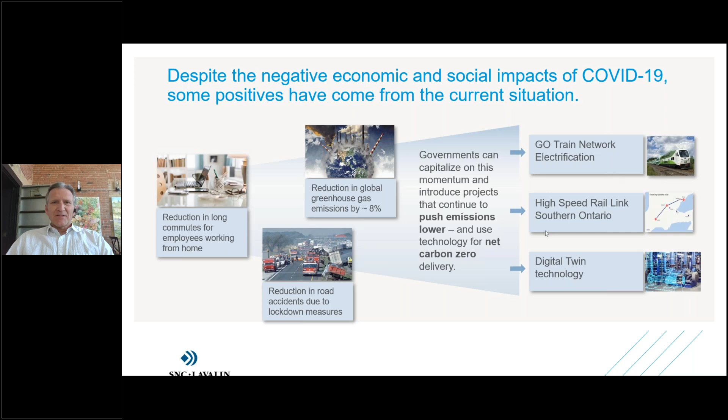So this really is showing that the money is kind of there for stimulus spending. We've seen some big headlines, a few of them noted here on this slide.

If we go to the next one, Barb. So here in Canada, there's also been quite a lot of chatter about stimulus spending and huge benefits from that. In fact, just yesterday, the government of Quebec announced $3 billion for the acceleration of about 200 projects in various sectors within Quebec to help stimulate that economy.

Ontario issued earlier this week RFQs for stages of development of the Ontario Line subway. Next slide.

These are all positive things. Economic data shows that when 1% of GDP is invested in infrastructure, the economic output increases by about 0.4% in the year that that is invested, and that increases to about 1.5% four years later.

Infrastructure spending creates jobs for Canadians. It closes the infrastructure gap we've heard about, and that gap has actually been limiting Canada's economic growth and Canadians' quality of life. So a lot of positive things can come out of the stimulus that may be applied to infrastructure. Next slide.

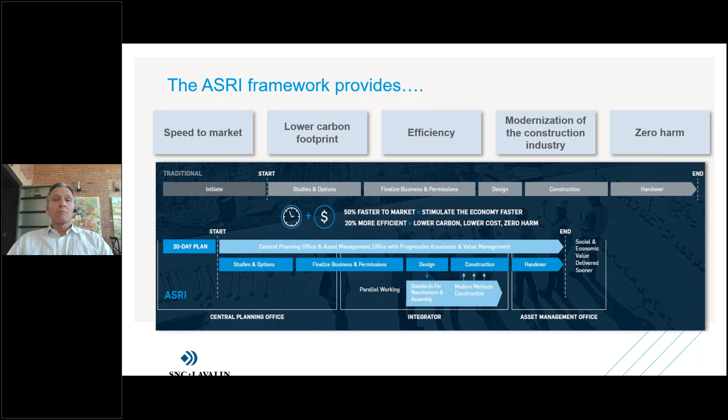We're really excited about this concept, currently discussing it with various levels of government as an opportunity for them to expedite shovel-ready projects and jumpstart the economy post-COVID. So that's it for me.

I'd like to now hand off to Kathy, who will talk about the nuclear sector. So, Kathy.

Great, thank you very much, Dale. Good morning everyone, and thank you very much for joining us today. I'd like to give some insight into sustainability from a nuclear industry perspective, and I have a couple examples to illustrate the points as we go through.

The first example is how we are helping to extend the life of Ontario's CANDU reactors. SNC-Lavalin is involved in Canada's largest clean energy projects. We are doing these projects in order to provide 30 more years of clean power. This is very important because nuclear provides 60% of Ontario's electricity.

Two of the main projects we're doing are at OPG Darlington Unit 2, which reconnected to the grid just this past May. This was a huge undertaking by a lot of people, and they really do deserve kudos for such a great job. Also, Bruce Power Unit 6 started their retubing earlier this year.

In order to support our clients and make sure they meet their sustainability goals, we have been investing continuously in developing advanced tooling for these retubing projects. It's important that we continue this investment because it helps reduce the schedule to get the nuclear power plants back online quickly, and also helps increase the safety of the operators while undertaking the refurbishment projects. Now, as our fleet continues to... could you please go back, Barb?

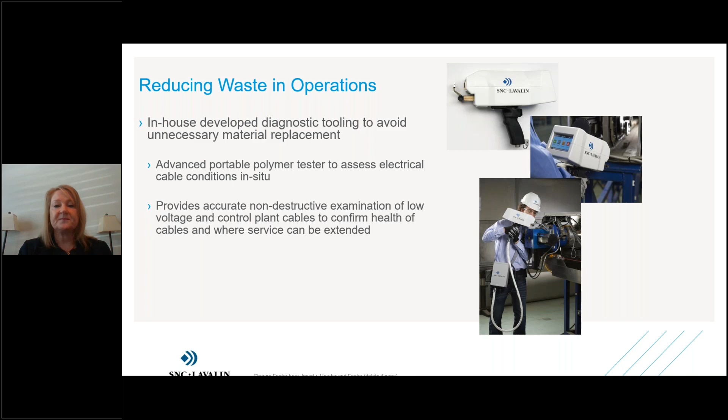Another way we're reducing waste in operations is by using spent fuel from other reactor types in the CANDU reactor. We can directly use recycled uranium in CANDU reactors without needing re-enrichment. We can also blend reprocessed uranium from light water reactors with depleted uranium, a byproduct of enrichment, and use both in the CANDU reactor to generate additional energy. This increases total resource utilization and reduces overall spent fuel per unit of energy generated. We're always looking at new innovative ways to reduce waste.

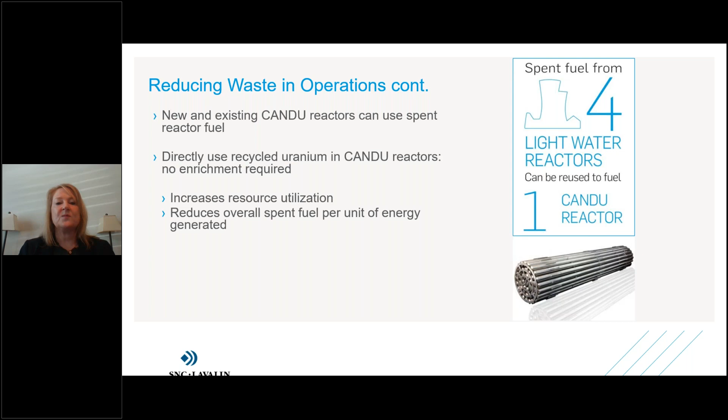Another area we're focusing on is decommissioning and waste management. First, we're looking at enabling a site, once decommissioned, to be reused. This involves meeting predetermined release criteria set out by regulators. If we can do this, we could even use these sites for offshore wind development or other renewables, repurposing them for a different energy productive use.

We're also looking at waste minimization, recycling and reusing materials when decommissioning. For example, we reuse clean concrete from demolition to backfill basements and landscape sites. We're also recycling metals and introducing these clean metals back into the nuclear industry. It would be incredible if we could take metals from existing reactors, clean them, and use them in the next generation of reactors we're building.

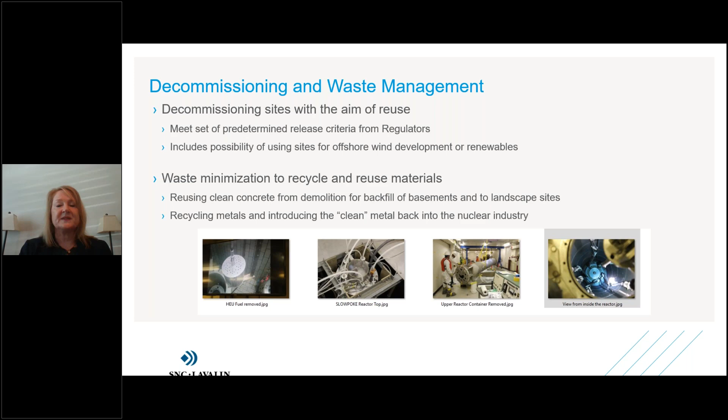As Dale mentioned, COVID has set us back in some ways, but we've been innovating to keep operating. One way is using digital solutions. I'll give a couple of examples, but we have many others we're currently undertaking.

We've continued site walkdowns and data measurements using handheld laser scanners and a 360-degree camera. This just involves one person, who'd already be going to the site, taking the tools and collecting data. This allows staff back home to use the data multiple times, saving many trips to the station, and in this COVID situation, allows our work to keep going.

The next one is the CANDU small modular reactor, which we're currently developing. It's a 300 megawatt reactor incorporating decades of experience and operational insight from our CANDU international success. We're employing cutting-edge digital innovations in the design, operations, and throughout the whole life cycle of the SMR. It's the most mature SMR design available in Canada, and would help Canada reach its goal of net zero by 2050.

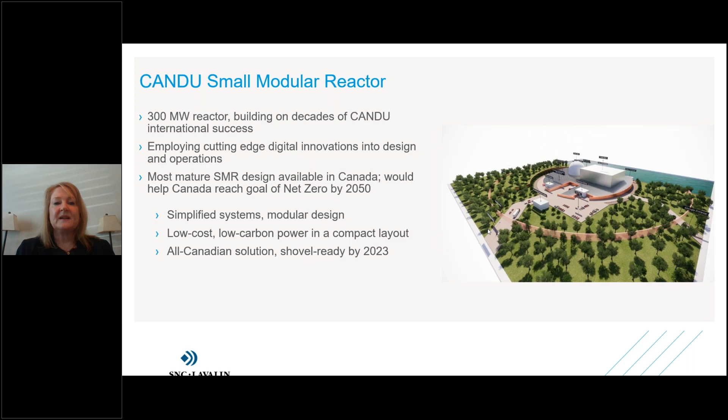That concludes the nuclear portion, and I'd like to turn the presentation over to my colleague, Sebastian Musso. Thank you, Kathy, for a really interesting presentation.

Today, I will present a few slides around dam safety issues and how good project planning, taking sustainability objectives into consideration, can help clients overcome critical challenges in their business. My goal is to share slides and comments about a project SNC-Lavalin is undertaking in Ontario for the Government of Canada, well aligned with sustainable principles. But first, I want to give a short overview of our dam infrastructure in Canada and the United States, and the impact of climate change on these structures.

Don't be afraid, I won't do politics or debate what's causing climate change. Let's just recognize the fact that climate is changing.

Let's start with an important definition. Dams are classified based on their hazard potential, or anticipated consequences in case of failure. A high hazard potential dam is anticipated to cause loss of life. A significant hazard potential dam should not cause loss of life, but will result in significant economic losses, including damage to properties or critical infrastructure. Then there are low hazard potential dams, which may cause minor damage to non-residential, unoccupied buildings or agricultural land.

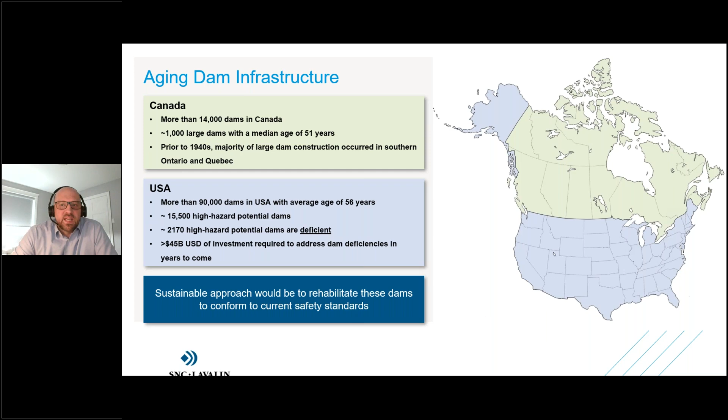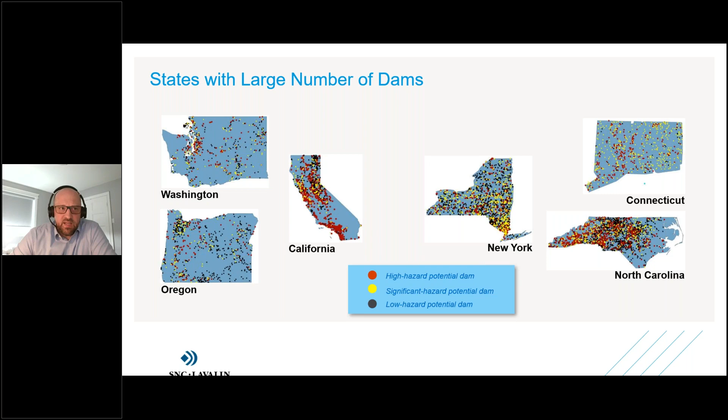You probably are all aware of the tragedy in Michigan a few weeks ago. After days of heavy rain in the region, the Edenville dams collapsed on May 19th. The dams were built around 1925. Interesting fact is that the license for the dam had been withdrawn in 2018 by the FERC because of insufficient capacity to withstand the probable maximum flood. Rehabilitation of the dams was being prepared, and construction was anticipated to start in 2021.

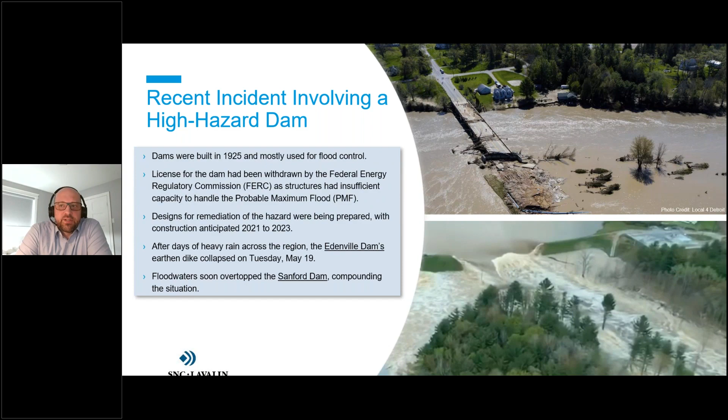On top of it, floodwaters also overtopped the Sanford Dam soon after. This is a great example of old and not so resilient dam infrastructure combined with climate change impact that could have triggered a cascading failure scenario.

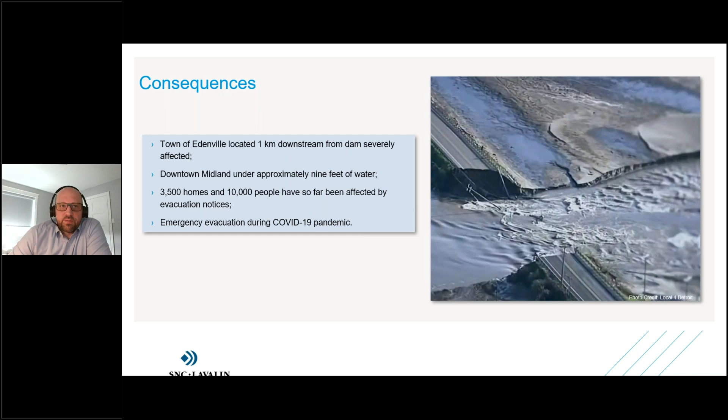My last slides will show you a good example of a project that relates to old dam infrastructures and climate change. The project is named Central and South Bundles, on the Trent-Severn Waterway in Ontario, and our end client is Parks Canada Agency. SNC-Lavalin's scope of work mainly includes engineering and design for replacement and rehabilitation of multiple dams and locks on the waterway, technical support during fabrication of mechanical equipment, and overall site construction support.

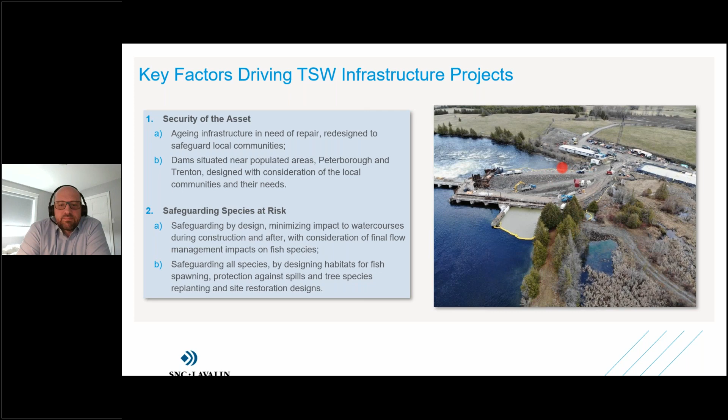Another key factor was to safeguard species at risk. There are fish species, fish habitats, and many tree species that had to be protected during and after construction. A good example of safeguarding species can be seen in the pictures of the Lock 24 site. You can see in this picture that we used turbidity curtains to manage sediments in the water. Also, on the right of the dam, there is a sensitive marsh habitat with species at risk that we are protecting.

Finally, the other key sustainability factors driving these projects are to create long-lasting operational locks and dams capable of lasting 80+ years with regard to flow management and navigation, and to keep the existing historical and cultural value of the structure, which was paramount for all the stakeholders involved in these projects.

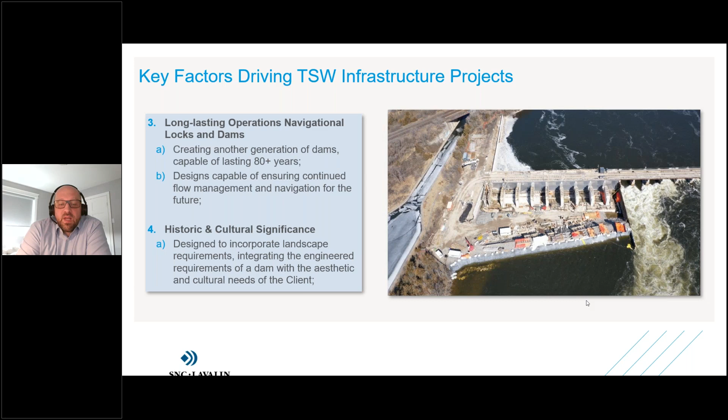Okay, thank you, Sebastian, very interesting content. So for the Mining and Metallurgy group, I'm going to talk about how we're helping clients maintain and actually improve sustainability of their operations.

I'm going to give three actual examples of what we've been doing at SNC-Lavalin. The first example will talk about off-gas capture and how we're helping clients minimize or eliminate off-gas emissions to the atmosphere. The second example will talk about acid plants and how we use them to help generate power to power an acid plant and downstream process units. The third example will talk about our mine reclamation group and how we're helping clients decommission old mines and design for potential mine closure once operations have finished mining.

Next slide, please, Barb. Oh, just go back one slide, sorry, Barb.

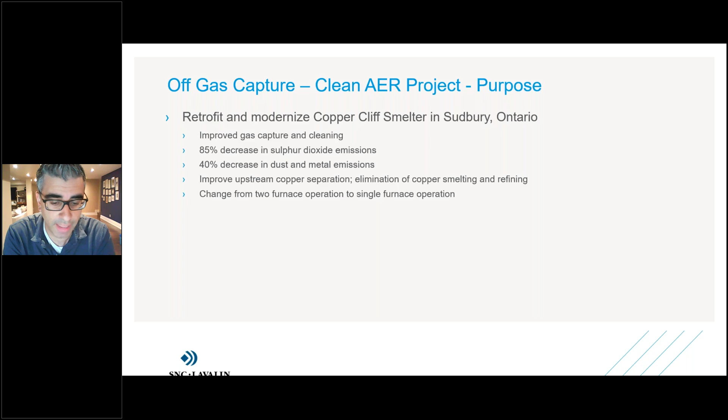The first project is one we did for Vale called the Clean AER project, an operating smelter in Sudbury which produces nickel. The main purpose of that project was to improve gas capture and cleaning, reduce sulfur dioxide emissions by 85%, and decrease dust and metal emissions in the smelter by 40%. We did that by replacing existing equipment with more modern new equipment, improving existing equipment, and running off-gas through bag houses and acid plants to make sure emissions weren't going to the atmosphere, but to the acid plant and the bag houses.

Next slide, Barb, please. The positive impact of this project: it created about 500 local jobs. It was a $1 billion plus revamp project, involving a lot of engineering and construction. The client was able to reduce SO2 emissions from 150,000 tons per year to 25,000 tons per year, a massive reduction.

By doing that, we were able to effectively render what we call the super stack not required anymore. The super stack in Sudbury is about the size of the Empire State Building, and previously SO2 emissions would go up it. To create draft to allow emissions up the stack, you have to have natural gas burners at the base. Now we're able to eliminate the super stack and those burners, resulting in CO2 emissions cut by 40% in the operation.

The lower SO2 and lower dust emissions in the smelter are good for the city of Sudbury, where people are no longer exposed to SO2, and for workers in the smelter who are no longer exposed to SO2 emissions and dust particulate. It's a much cleaner environment to work in.

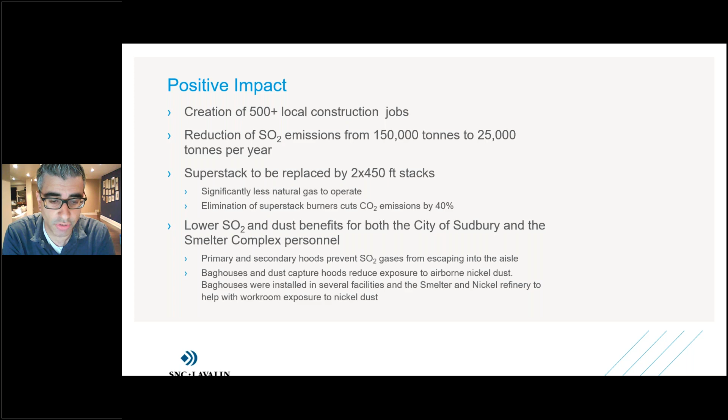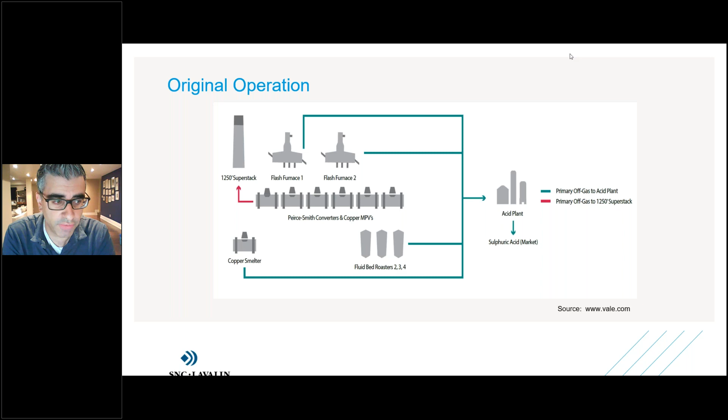If you go to the next slide, it shows how we revamped the operation. We took those 6 converters down to 2 converters, which are more efficient in operation, and then we run the gas through a gas cleaning plant and ultimately to an acid plant where sulfuric acid is produced, which the client is able to sell as a byproduct.

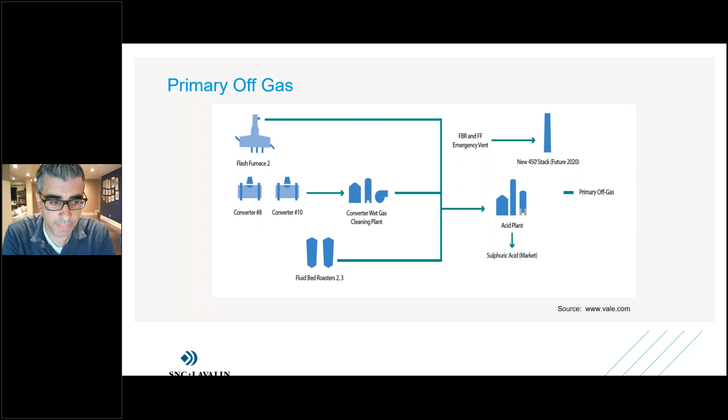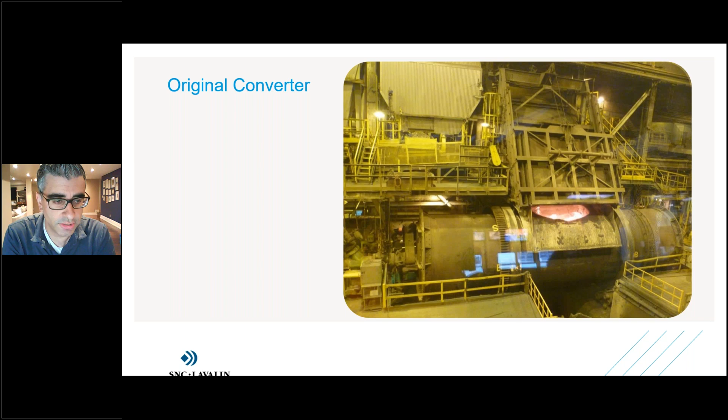Next slide, please. This is a picture of the original converter. We basically demolished two of these converters and put in two brand new converters. Next slide, please—this is a picture of the new converter in the smelter.

This is a picture of the converter operating. You can see a primary hood has come down over the converter, so all of the main off-gases coming off the converter when it's blowing go up through the stack system and into the wet gas cleaning plant and ultimately to the sulfuric acid plant.

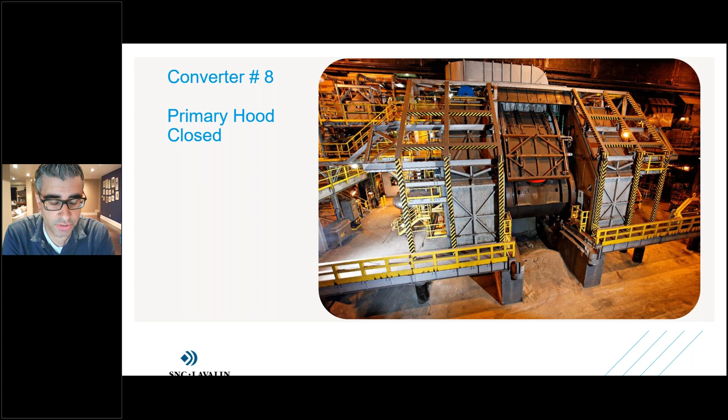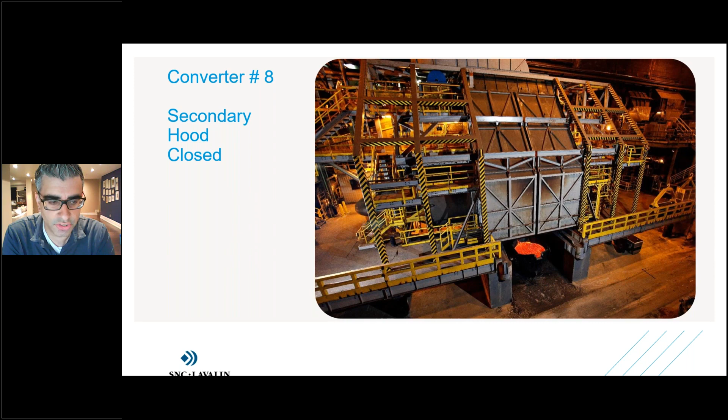Next slide, please. These are the secondary doors which close and capture fugitive emissions and secondary emissions. You can see that the converter now operates in an envelope where all of the off-gas is captured and scrubbed and cleaned, and the off-gases are no longer present in the smelter aisle.

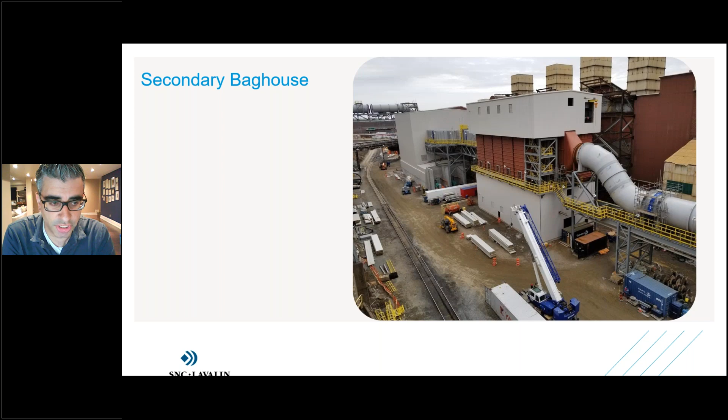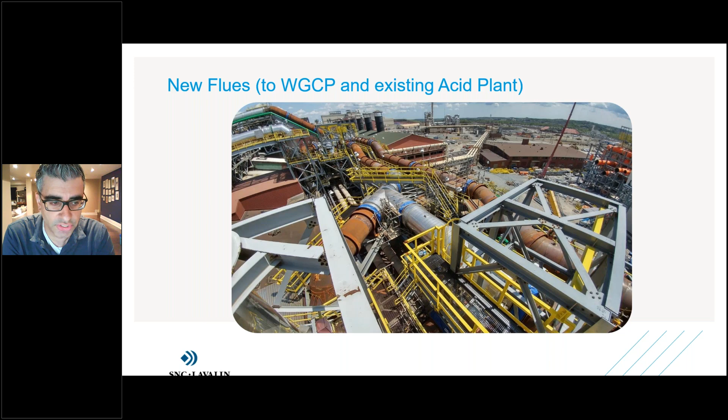Next slide, please. This is a picture of our secondary baghouse, which we use to capture secondary emissions and dust particulate that could be present in the smelter. Next slide, please—this is just an overall picture to show the complexity of the smelter we were involved in. It was a very old existing plant, and we had to interface and tie in with a lot of existing ducting in order to make sure we captured the off-gas correctly.

Next slide, please, so I'll go on to acid plants now.

Within SNC-Lavalin, we work with MECS DuPont to build acid plants around the world. The previous plant I showed you has off gas, and off gases can be captured and sulfuric acid can be produced. So that's one benefit of an acid plant.

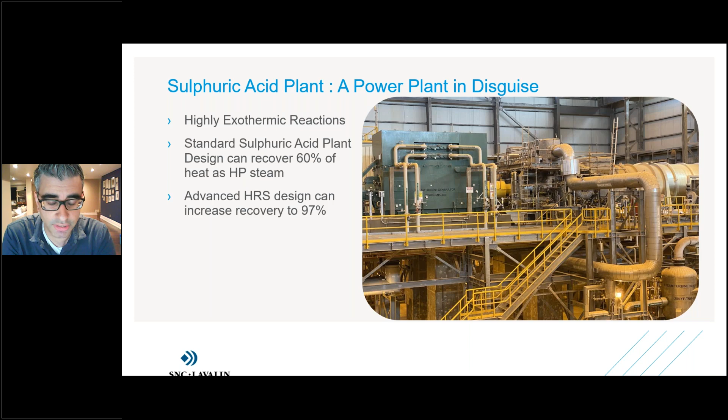However, acid plants are also highly exothermic units that generate a lot of heat, so we capture that heat and create power. In a standard acid plant, we can recover 60% of the heat as high pressure steam, and in some of the more advanced heat recovery system acid plants, we can recover up to 97% of the heat. These are just a couple of pictures of existing acid plants we've built over the past couple of years.

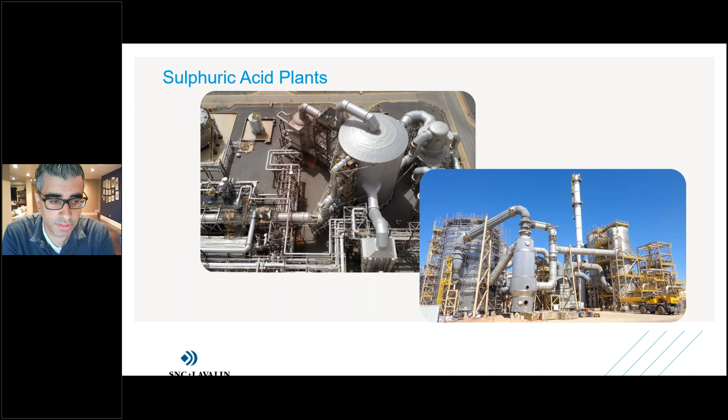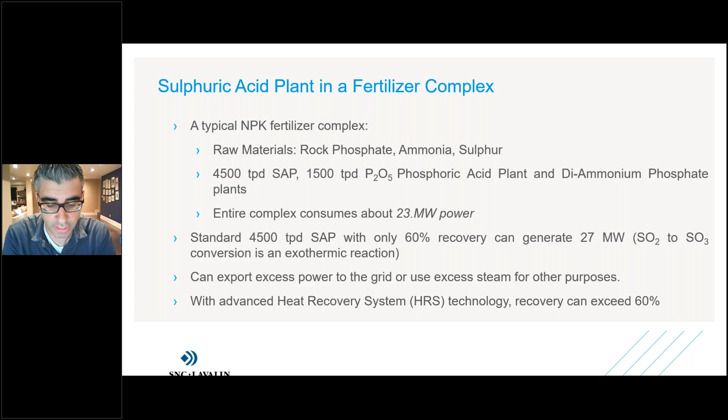An example where we can use power in an acid plant is in a fertilizer complex. There, sulfuric acid is produced and used for production of phosphoric acid, and then down the line we produce fertilizer. A typical fertilizer complex needs about 23 megawatts of power. A standard acid plant that produces 4,500 tons per day of acid can generate up to 27 megawatts of power. So the acid plant generates enough power not only for operating itself but for the downstream process units, with extra power left over that we can sell back to the utility. We don't have to create a separate power plant to power a fertilizer complex — we can use a process unit within the plant to power the entire complex.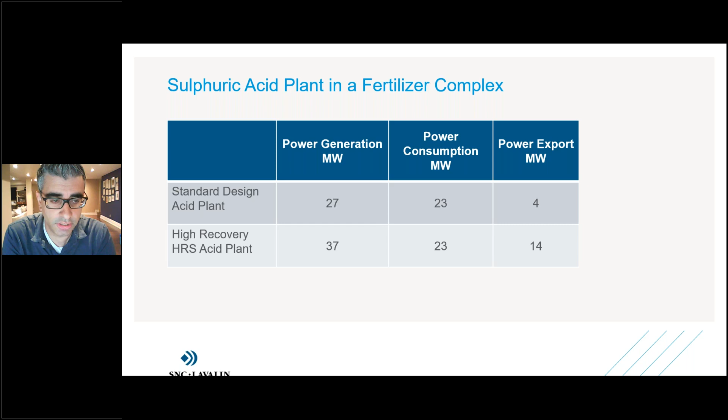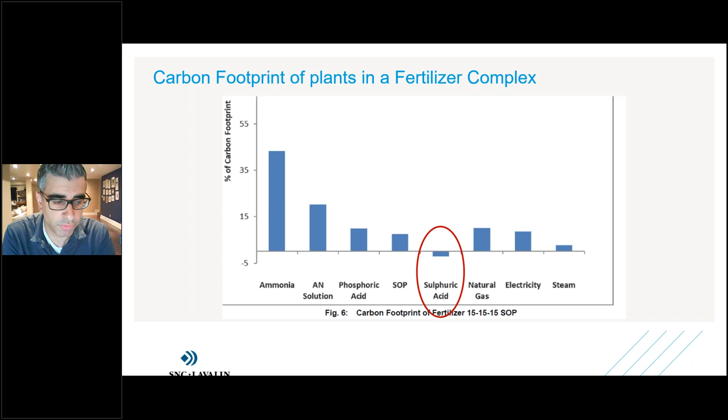Finally, I'll talk about mine reclamation. When we're doing mines and new operations, clients have to consider eventual mine closure, so we help them develop mine closure plans. We also go into very old or decommissioned operations and help clients reclaim those sites and close their tailings facilities.

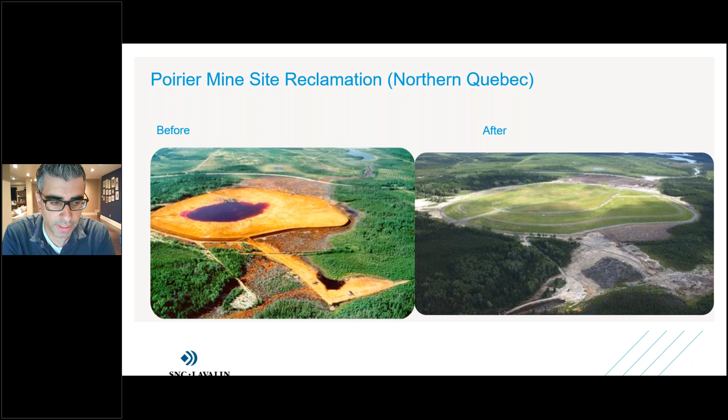So those are just three examples of what we do in sustainability, and I'll hand it back over to Barb now. Thank you.

Thank you, everyone. Really interesting presentations, and it's great to see examples of sustainability throughout all the different types of businesses and industries that we have here at SNC-Lavalin, but also within Canada.